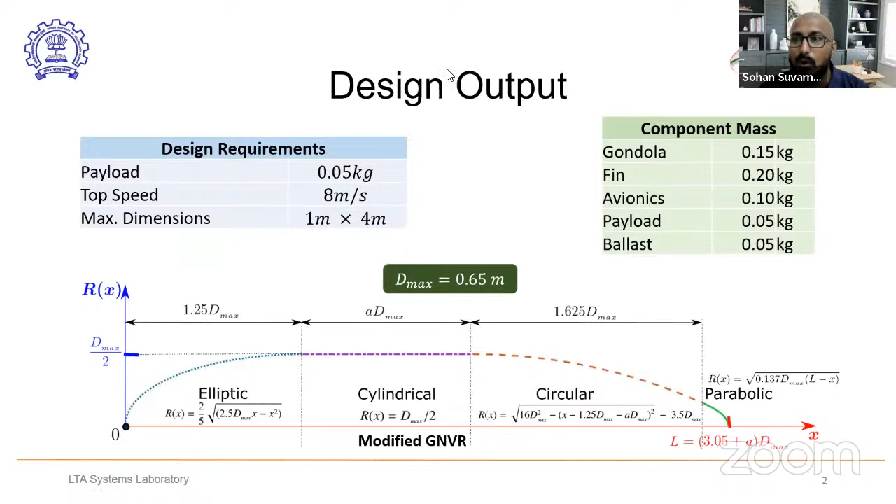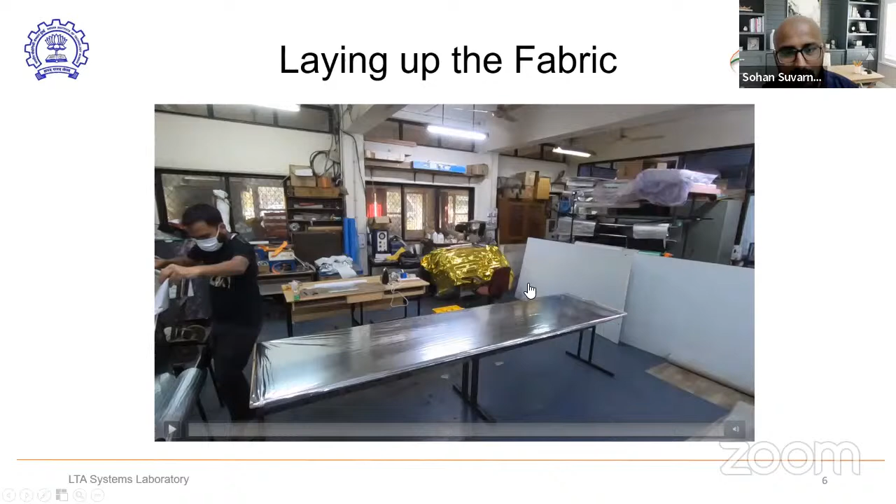After that, we would just lay the material. We have a roll here, and from where I'm standing I am handling the roll. You just roll the material onto the table and lay them one over the other. Here we lay the first layer, and then you just fold and lay another two layers, one on top of the other, just to save some time. So overall we have 3 petals being laid all together right now, and we just repeat that again and again.

So I think while we were making this, we planned to make about 2 envelopes, so one was a backup. We laid it probably 2 or 3 times, I think 2 backups and 1 actual envelope. So we laid it 3 times, so there would be a total of 12 petals, 4 per airship.

So this is the next step, we lay the petal. This is that petal template I was talking about. You get a 1:1 print and then lay it on top of this. So you have about 4 and another 8, a total of 12 petals, 12 layers of MPET under the template. So you would be cutting 12 petals at once.

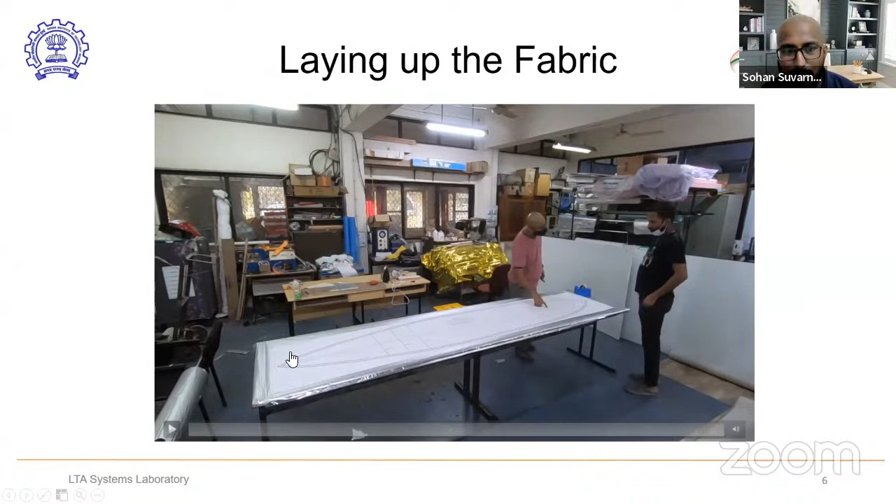Okay, so this is the template. You lay it on top of it, and you just make sure that it's properly stuck onto the material. And the next thing is just cutting all the petals, so you just cut them like this.

Again, I have to remind you, this is a very, very delicate material, about 30 microns thick, very thin. Which means you have to be careful while applying pressure while you cut. So I would say maybe practice on small bits of material before you actually use a cutter on the actual petal, so that way you know how much force you need to apply while cutting the petals.

So here, when we are cutting this, we are also cutting the template. You see this white extra paper that you have on the sides, so even that is being cut. We are just traversing the black line on the template, that's what we are doing.

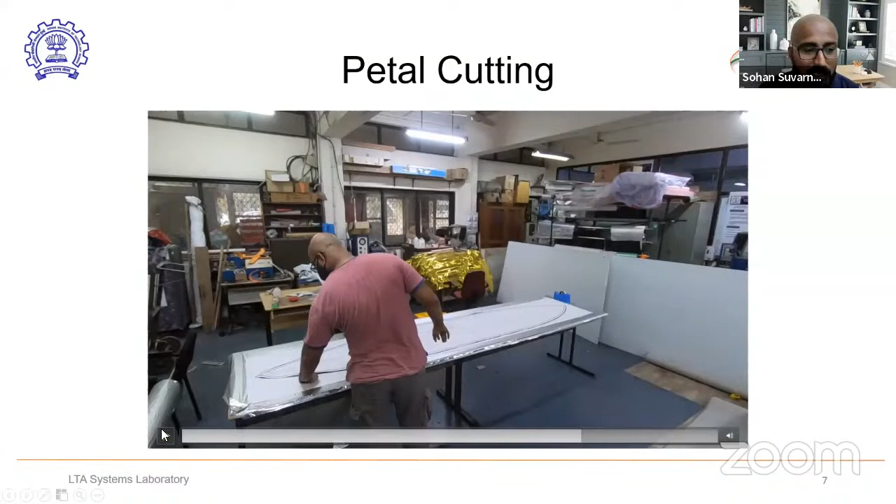So you basically just try to cut all the layers at once. You would have to apply enough pressure to cut all the 12 layers, and also be careful not to apply too much force and not cut it too quickly, because that would then damage your petal.

Okay, so once you have the petal cut, the next thing is you have to pick all the petals and just lay them all together. So this is the last 4 petals.

So you see, you can clearly see here that we have actually joined 2 tables. These are basically work tables where, in our lab, we keep the PC, and you have these 2 holes, so basically this is the desktop station. It's not a very good idea to have the cuts wherever you have these edges, because then it would damage your petal while you're cutting it. So you have to be very careful while you place the template, so as to not encounter abrupt changes in the surface. Okay, so we remove all these layers that we have.

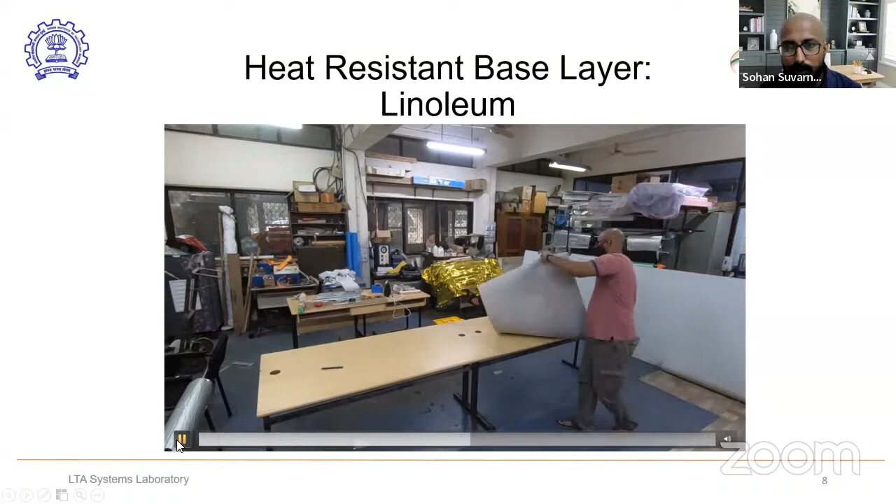Now this is something which is not exactly mandatory, but there are other things that you can do. This is something that I would suggest would help you in making a better envelope. So what we are doing right now is laying a layer of linoleum. This material that you see is linoleum, typically used for flooring, the blue material that you see, it's that kind of material. The reason why we are laying linoleum here is because it's heat resistant, and it also gives us a smooth surface while we are sealing the petals together.

So that's the idea behind laying up the linoleum sheet on top of the table. You could also use glass as a base, but having such a big, huge glass is then another problem—how do you handle it? And it also becomes expensive.

But if you don't have anything, you could just use the table, but make sure you have some kind of insulation on top, because if you have sun mica on the table, it's going to get damaged. On a wood table, maybe you can keep a layer of some heat resistant insulation material. This is easy to obtain.

For linoleum, you can look at these materials on India Mart. Even the envelope material you would get on India Mart near your locality. That is the best way to find materials for these things. So we just attach this on the surface.

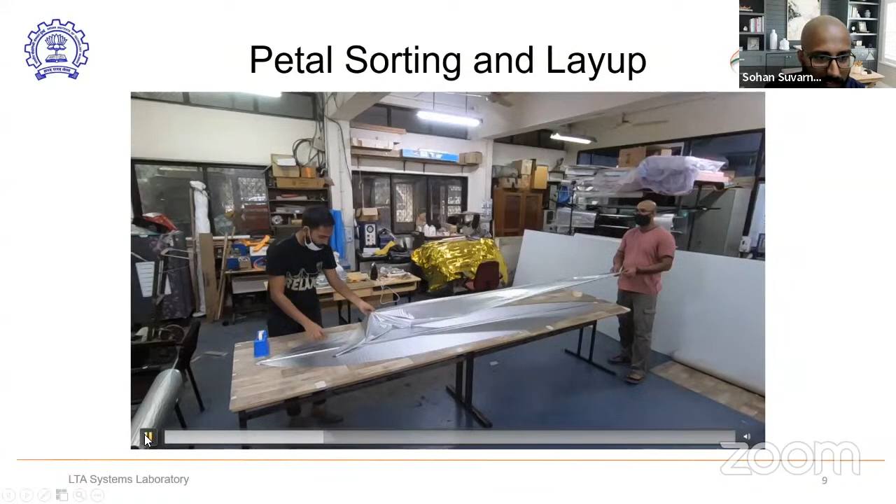You see, there is one half, and then there is the other half that we had put. Then, this is the last petal—the fourth petal. We put it so that the sealable layer is facing downward, so the shiny part is up.

Now all the sealable sides of the envelope are coming in contact with one another, and the non-sealable parts are on the outer sides. This is how we do it. Now make sure the petal sticks to the base plate very firmly so it doesn't move when you do the sealing.

So I'm cutting a piece from the side and keeping it aside. If you're looking at me, we will tell you why we did that later on.

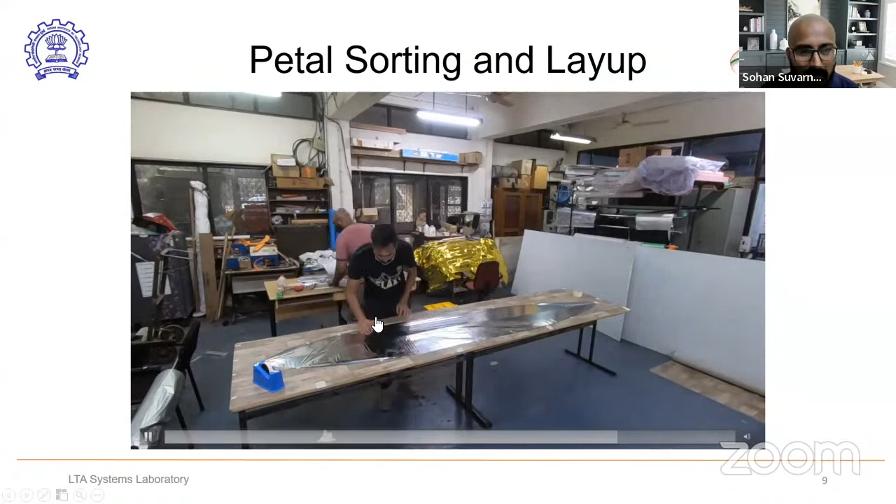So once the petal is put and sticks properly onto the table, the next thing we want to do is seal. There are a couple of ways you can seal the envelope: a butt joint, a lap joint, and a cusp joint.

So butt joint is something like this. When you go for a butt joint, you will have the envelopes such that one sealable side is facing up and the non-sealable facing down, and the other one would be the opposite—sealable, non-sealable, sealable, non-sealable in that way.

When you are actually attaching it, it needs to be in a way that this is the sealable part, this is the sealable part, and this is non-sealable. For butt joint, it should be like this, so you see that one side is non-sealable and the other side is sealable. That's how you would see when the envelope is blown up.

Lap joint, on the other hand, requires another extra piece. You just basically lay them up together, and then you have another material on top of them. That's lap joint. Cusp joint is basically you paste it like this - you have two envelopes, both sides sealable, and then they come together like this. So basically that is cusp joint.

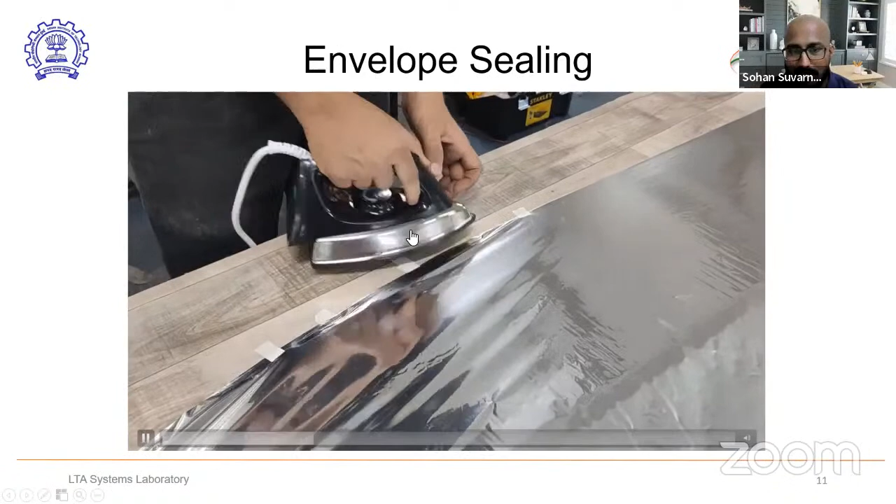You basically have to take your time in doing this. Using the iron, it would take about 1 hour to properly seal it. You have to handle it very well, get your hands steady on the envelope to get a smooth finish. Also, I want you to note the heat settings - for us, it was the middle option that worked on the knob for the heat. It might be different for the iron that you have.

Let me see, there are some questions. So for aerostat, which is the strong... Okay, let me answer those questions after a bit.

Once you move the iron on top of this, you basically are making sure you're sealing the petals together. You would have to do multiple passes - that's what we are doing here, just to ensure that the seals are well done.

So this is how you would seal.

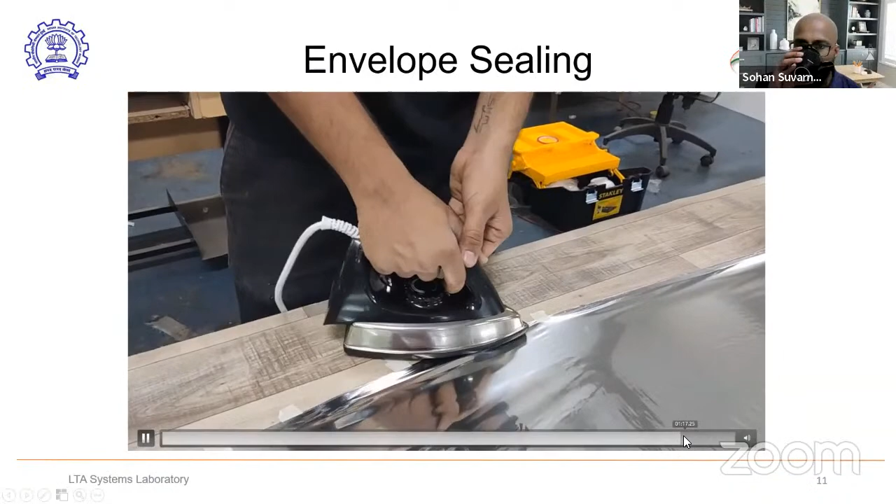All right, so let me take the questions now. For aerostat, which sealing do you suggest - which is a strong joint, lap or butt? So for aerostat, it depends on the size that you want to build and also the material that you're using. If you're making a small aerostat, you can just go ahead with the electric iron and make an aerostat. But if you want to make a big one, then your material would change, then you would have to use something a bit more elegant, like radio frequency sealing if you're using PVC or polyurethane. You can also use adhesives if you're using polyurethane - there are some PU adhesives that you can use.

So then there is another question - the butt joint you're showing is actually the lap joint, and the lap joint is the butt joint. I am not sure that is right, but you can have a look and let me know.

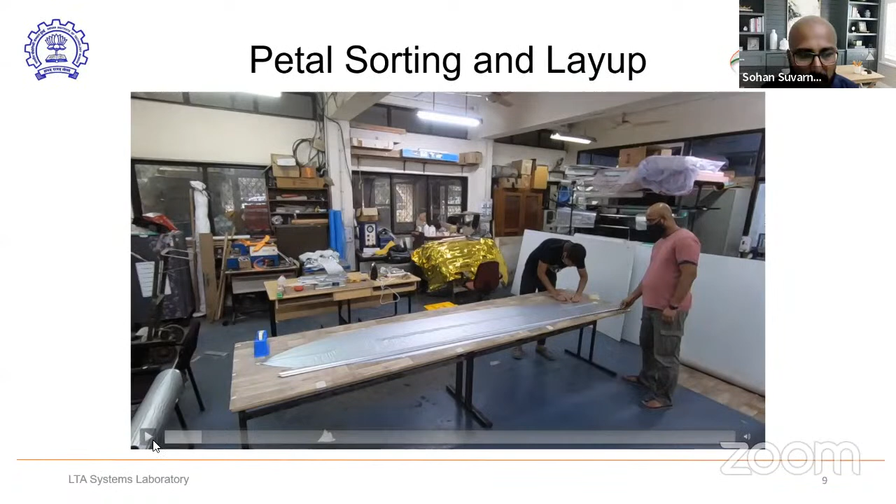So once that is done, you place the half here. The reason is when you actually blow air into this, or even a gas, it would basically open up. If it is folded, it would just open up like this. So that's the reason why we keep it folded in between.

You can actually try this out on paper. Cut the petal shapes very approximately, try to get this form. Mark the sealable and the non-sealable part on the paper, place it like this, then apply glue on the edges, and when you blow it, it actually takes the shape of the envelope. That is the reason why we want to place it in this fashion.

It also would not damage your envelope while you're sealing it, because then you would have to turn it over and over again. If you're doing one seal at a time, it means you have to turn your envelope every now and then.

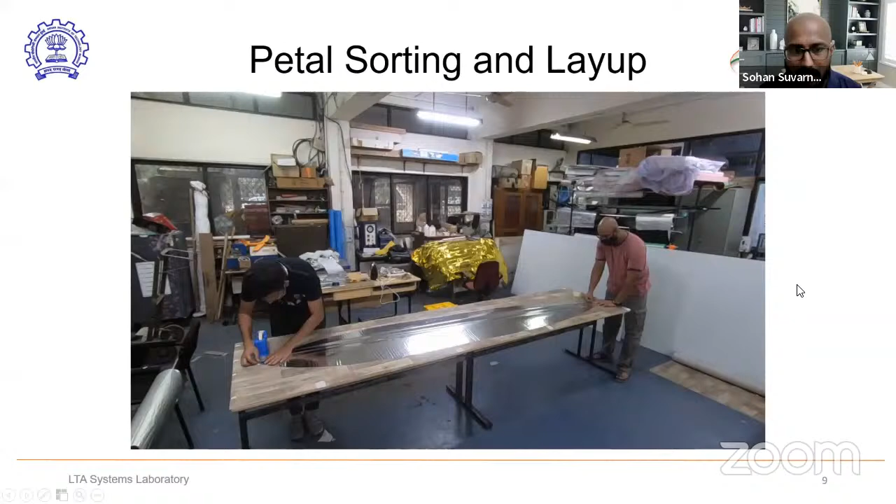I think that answers the question on why that. So the next one is the nozzle. Once you have done the sealing of the envelope, you need to also be able to fill it, so that is why we need a nozzle.

This is what I was doing earlier when I said I was cutting a piece of material. You basically cut a piece of the same material, MPET. You cut it very nicely and get this piece - a rectangular strip.

Then you fold it, and now you would seal at the edges. You basically seal at the edges. This is a double pass, so we are ensuring that the seal is firm.

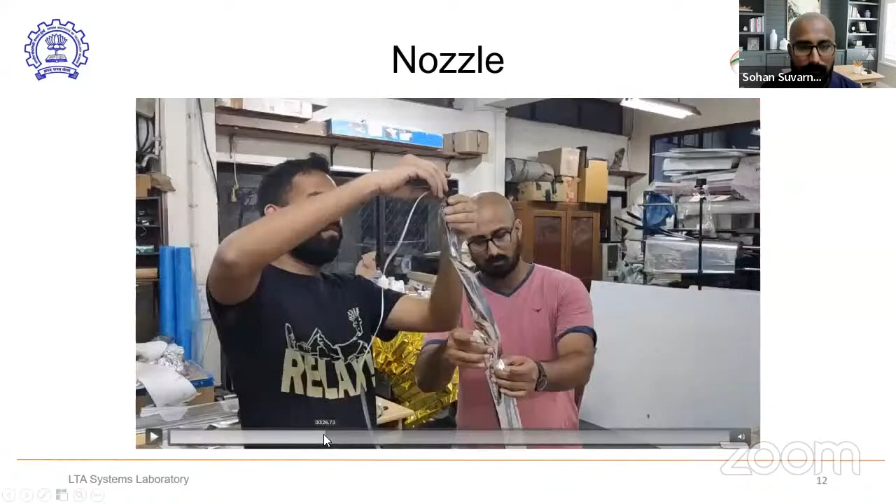Once you are done with the sealing, how would you actually attach this part? As I told you, the shiny part is not the sealable part. It's the white, less shiny part that's the sealable one, the polyethylene layer.

So what we need to do is turn this pipe, the pipe that we just made, inside out. How do we do this? We would basically insert a rope or string to get it on the other side.

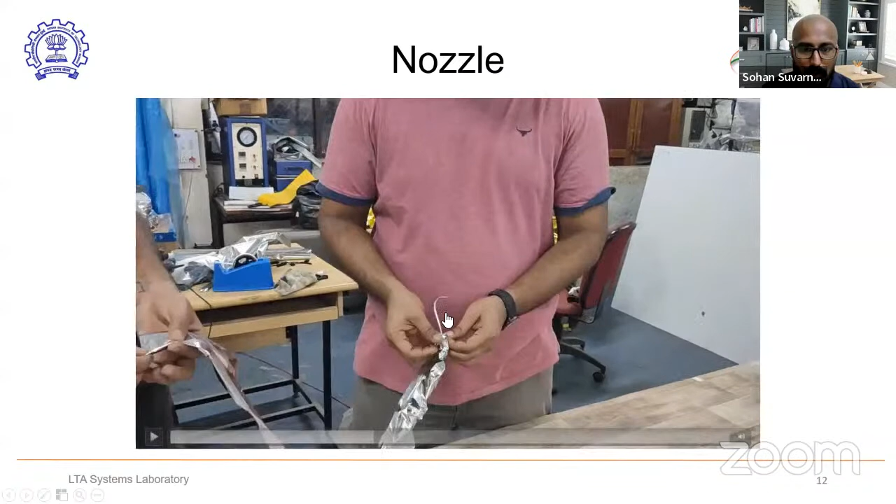You basically drag the string to the other side, so you have the string over here. Once you have the string, you attach it to the end of the pipe, the nozzle you just created. I just stick it with tape - you can use any kind of tape to stick that thread, then pull the thread from the other side. That way you are basically turning it inside out.

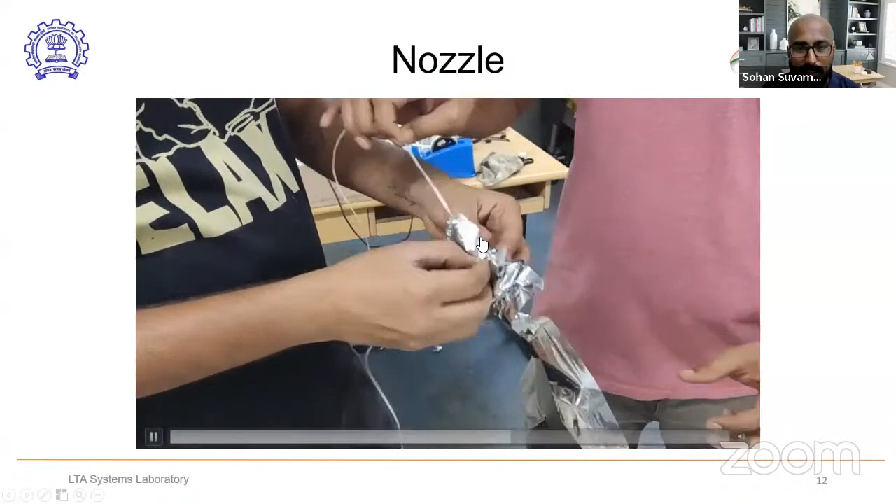So now what happens is the shiny material is on the inside, and the adhesive or sealable layer is on the outer side. You just pull it all the way out, and then you have this sealable part on the outside. So now you have the side you can work with, which you can put in between the petal welds, and you can have the nozzle there.

So here is your nozzle. You can remove the thread after you're done because you don't need it anymore.

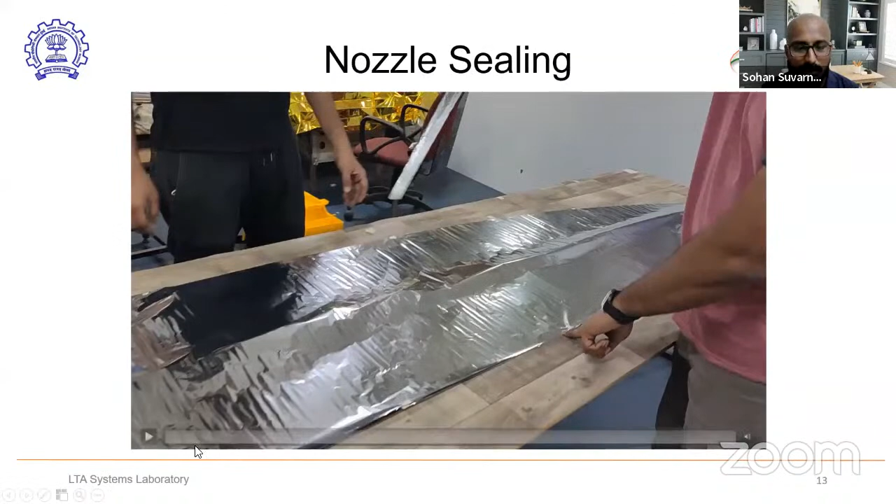Okay, there is your nozzle. The next thing you want to do is seal the nozzle. You place it towards the tail and towards the bottom petal, basically putting it in between two petal seals. You put the nozzle inside and stick it with some tape so it stays in place. We're using masking tape to make sure it doesn't move when we are sealing. So this is before we actually start sealing the petals.

Okay, so I'm putting a layer of butter paper, or tracing paper as you may call it, on top of this, so that when I move the electric iron on top of the material it doesn't stick, because the nozzle has the sealable part sticking outside. If you move the electric iron on top of it, it would just stick and damage the surface of your electric iron. That's why we are putting this butter paper on top.

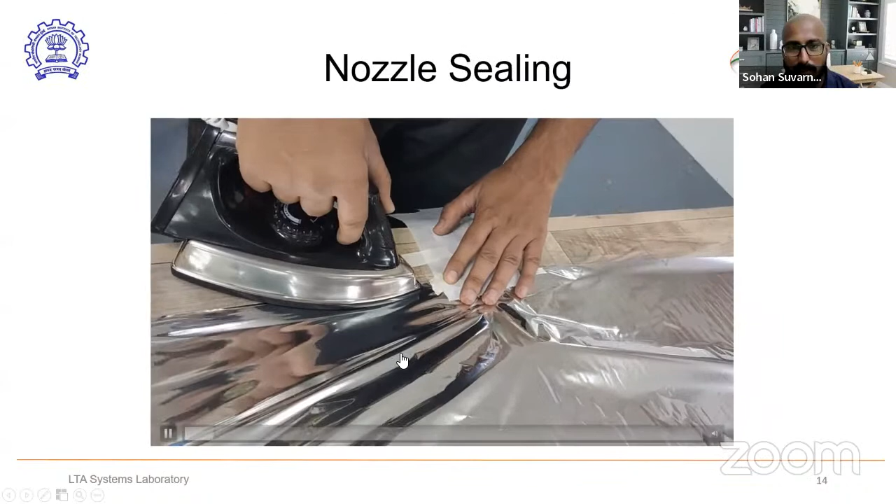You make sure it stays in place using tapes, and next you just move the electric iron on top of it to seal it that way. You have to be very careful, and maybe apply a little extra pressure while sealing the nozzle, because there are more layers there, so the heat needs to penetrate all the way down. So you make a couple of passes over the nozzle and you have it sealed.

Okay, so basically you are able to seal the whole petal now by these methods. Now once you have the entire sealing done for all the joints, you would basically want to check if there is any leakage.

The first thing that we will do is fill it with air, using this kind of pump, an electric air pump. This is very cheap, you will get it for about 500 Indian rupees, you would get this on Amazon. This is typically used for inflating air mattresses, inflatable toys, and things like that.

So there was one question: is there any other way of doing the sealing, like using any particular adhesive? Yes, but not for metallized polyethylene. For metallized polyethylene, heat sealing is the best thing that works out. It depends on the material that you have. Depending on the material, you can go for adhesives. As I mentioned, if you go with PU coated nylon, you could use PU adhesives. Although you have to be very careful while using adhesives, because adhesives also take up weight. So if you use 100 grams of adhesive, it would just add 100 grams of weight to your airship.

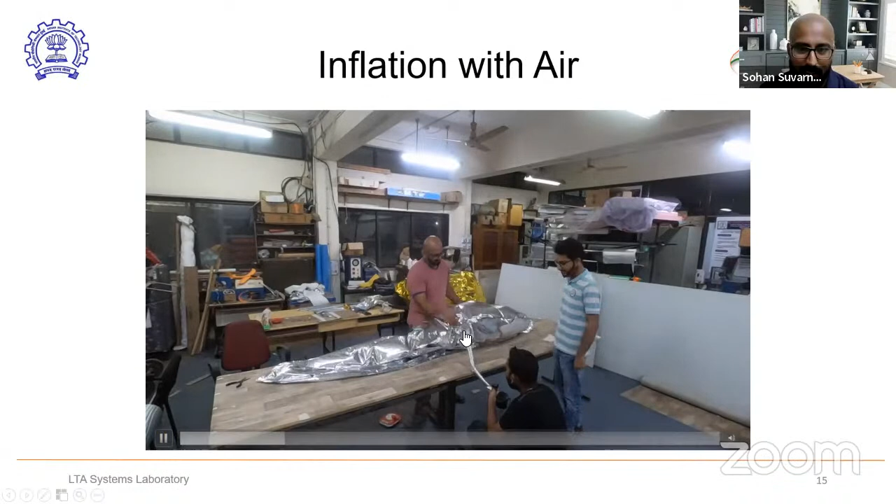So let's go ahead with the inflation. Raman has plugged in the nozzle to the air compressor, air pump, and we are just blowing it up. I'm making sure there is no leakage at the nozzle, and we just fill air, inflate it. So you see, this is how those folds basically open up now.

I don't know if it's very clear, but here around this point, around the center line, there is this faint line. This is the folded petal in between, and this is the reason why we had to do it. When this is folded, this seal and this seal both got sealed together at once. That's why we folded here at the center, and we placed it the way we placed it because that way we were able to seal it much quicker.

Okay, so it's all inflated now. Raman just folded the nozzle there and put some tape on it so the air doesn't leak out. That's the reason why you would want to have a very long nozzle, so that way you can fold it up and apply tapes on it so it doesn't leak out. That's how you're ensuring the gas stays inside.

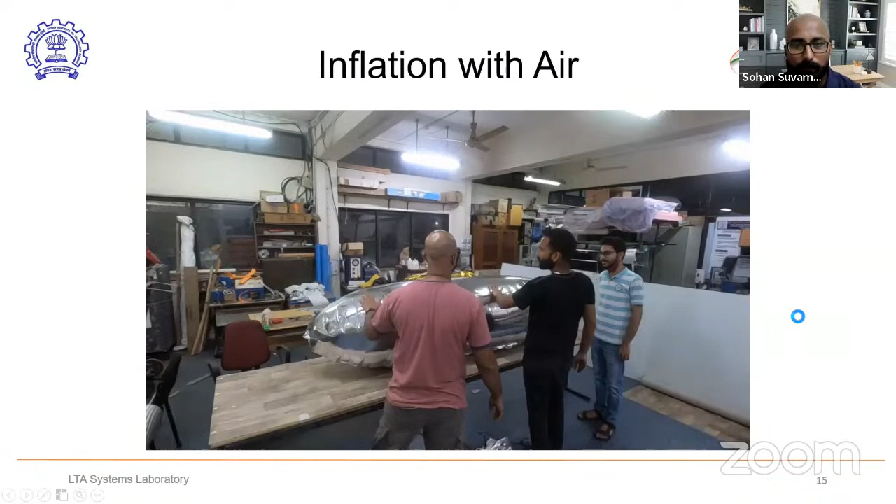Okay, so once you're done with inflation, I will show you the most sophisticated way of measuring leaks using a very sophisticated sensor, and that sensor would be your hand. I'm just moving my hand on top of these seals to see where exactly there is leakage, if there is any leakage over the seal. You have to be sure that the first thing that is very likely to leak is the seal, so that's why I'm checking the leaks there first.

So Raman is holding the envelope a little pressed like that, because we want to know whether the air is gushing out, and that happens only when the pressure is high inside the envelope. That's the reason why he was holding it tightly, so the pressure inside is higher.

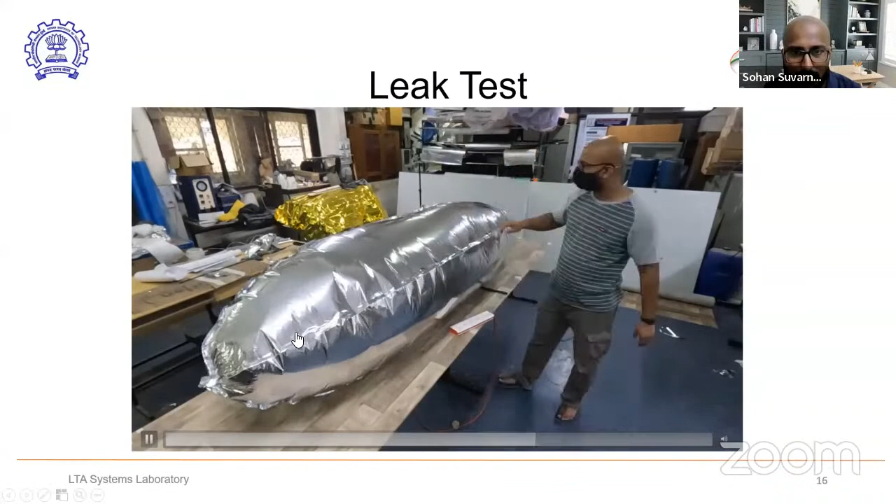So I think, yeah, for this envelope there was a leak on the petal itself. There is this small dot here, I could feel some air moving out. So we are using a sellotape to just patch that particular leak. This is how you would repair your envelope, just apply a patch and there you go, as simple as that.

So there's a question about how to prevent kinks. If there's enough envelope pressure inside, internal gas pressure, then there won't be any kink. That's what maintains the shape of the envelope.

Can you use soap or shampoo to check for leaks, like a puncture guy would? Yes, you can, but unfortunately you'd have to apply it all over your envelope, which gets messy. Also, dipping it inside a bucket isn't a good idea because finding such a big bucket would be a real challenge. Maybe you'd have to take it to a swimming pool and dip it all the way down, like the puncture guys do. But it's not a great idea because you'd have to carry the whole thing to another place and dip it. It's also difficult because of buoyancy, since the difference between densities of water and air is high.

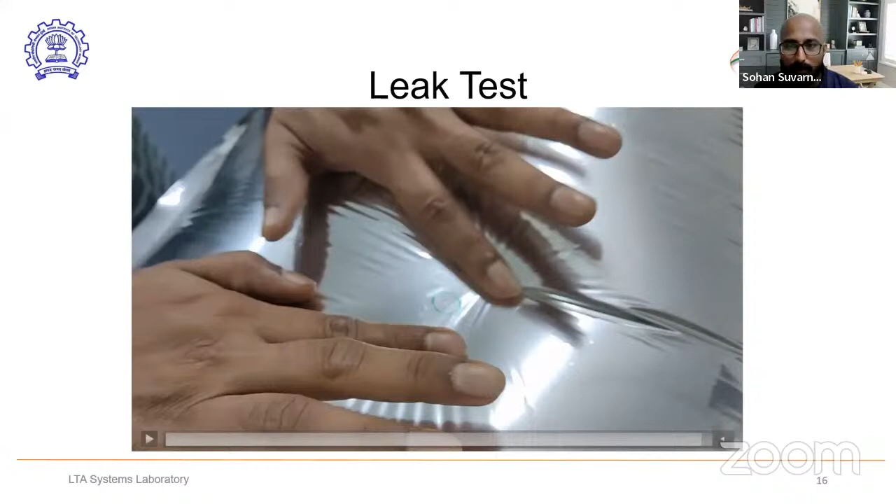However, that again would invite a lot of trouble. So the easiest way is just using your hands. Trust me on this, it's the easiest way. I've tried other methods, but this is the one. You have to be really slow about it. This footage is actually at 8x speed, so I've been very slow while checking for the leaks.

There would be a lot of wrinkles on top of the seal. When you look at this, there are many wrinkles, and when you apply tape on top of it, there would be airways in between through which the air could gush out. That's why you don't use tapes. However, if you want to cover the seals, you can apply sellotape after sealing, so you get a nicer looking envelope. In fact, I used to do that for a couple of my airships as well.

Girish asks, do you leave the joint cusps on the outside, or is there a way to turn the envelope inside out? There is a way. Just like you did it for the nozzle, you can do it. You just leave one end open. But then the tricky problem is you would have to seal the open end. That becomes tricky, and in our experience it usually ends up having a lot of leakage at that point. So we usually don't do it, but you can. It's not that you cannot.

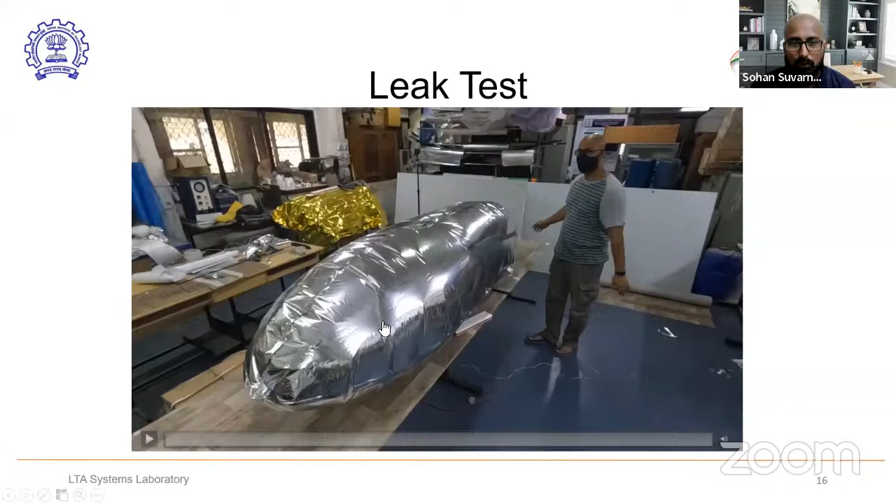Okay, so let's move ahead. I've already discussed this air pump that we use to inflate the envelope. Now the next thing we want to discuss are the hooks, because as of now the envelope has nothing that you can mount something on. So you need some kind of hooks using which you can attach items onto it, like the gondola, the fins, and anything else you want to attach. This is one way of doing it, a very simple way, and let me show you what it is.

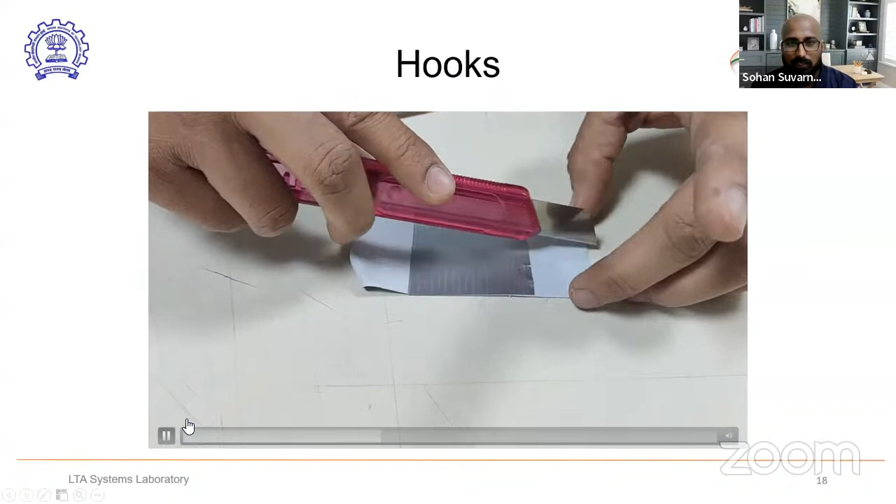So that's a duct tape, it basically has a layer of fiber on it, and the adhesive is quite strong. What we do is take this, put the adhesive side up on the table, then cut a smaller piece and make a band-aid out of it. Here the white ends are the adhesive ones, and the silver one is stuck onto it, so that side is not adhesive anymore. Then we just cut it into half, and now you have two band-aids. This band-aid is the hook.

I want to talk about that blue line as well. This is another airship on which I'm attaching the hook. You basically attach it like this, so you have a C shape there, kind of like this. Here is where your non-adhesive part would be, and this red one is the adhesive part. So this is how it would stick, and you can basically put anything over here, pass a rope through it, or even a pipe, or whatever you want to do. It's basically a hook for you.

The blue line here that you see is that tape I was talking about. This is again a cusp joint, and on top of it we put a blue tape because we wanted to hide the joints. This gives a nicer look to the airship. You can also make it a little smoother, more aerodynamic, because when the cusps are hanging out, the seals create additional drag. If you just stick them onto the envelope, it remains smooth. It's not mandatory, however.

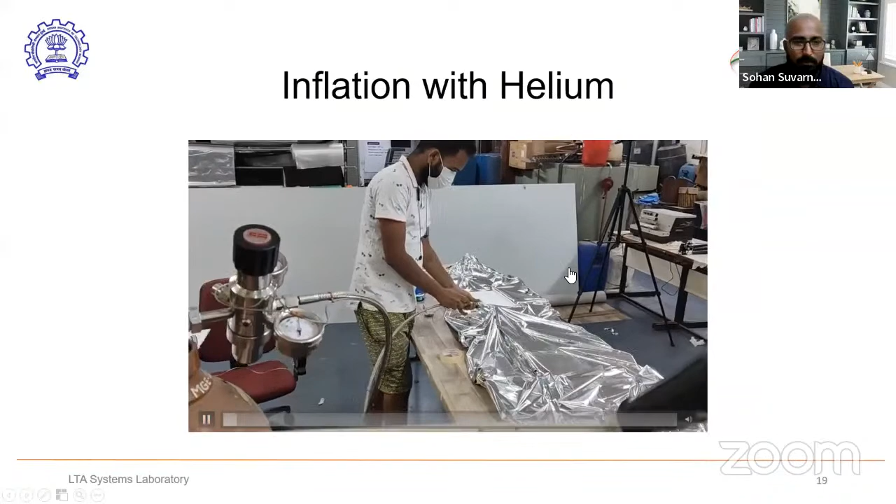Okay, let's look at the helium bit. Once the air is removed from the envelope, you want to inflate it with helium, and that's what we're doing. We put the nozzle of the cylinder to connect with that of the envelope, and there you see it's very slowly increasing. Raman is constantly controlling the pressure, so we have control of how much gas is being released into the envelope.

Okay, I want to show you something here. Have a look at these seals. So here you see four seals. These seals are put here to attach the gondola. And this is the bottom petal.

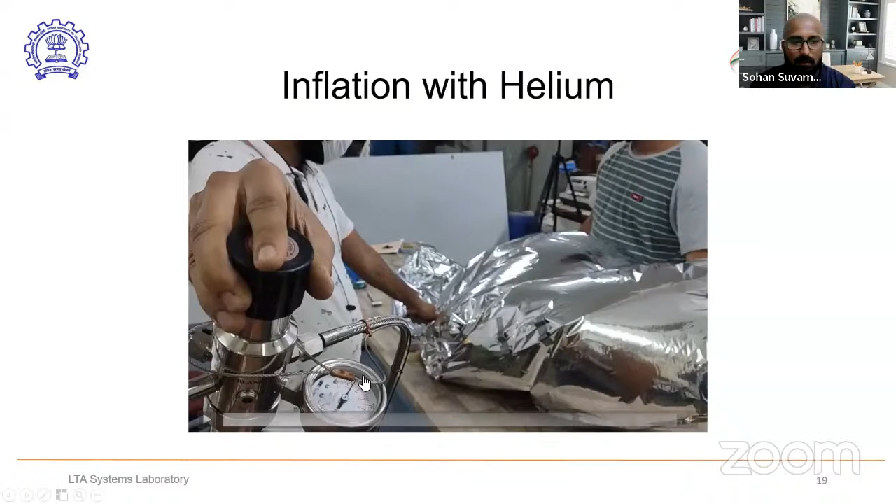So going ahead with the video, we'll talk about that later in further sessions.

Here you see an example of a kink. The reason this kinking happens is because helium tends to go upwards, since it's a lighter than air gas. So two independent bodies of gas form here, one at the tail end and one at the head, both having the tendency to move upward. That's the reason you get this kind of shape. But when there is enough pressure, both gas bodies connect and the kink disappears. That's why maintaining internal pressure is important.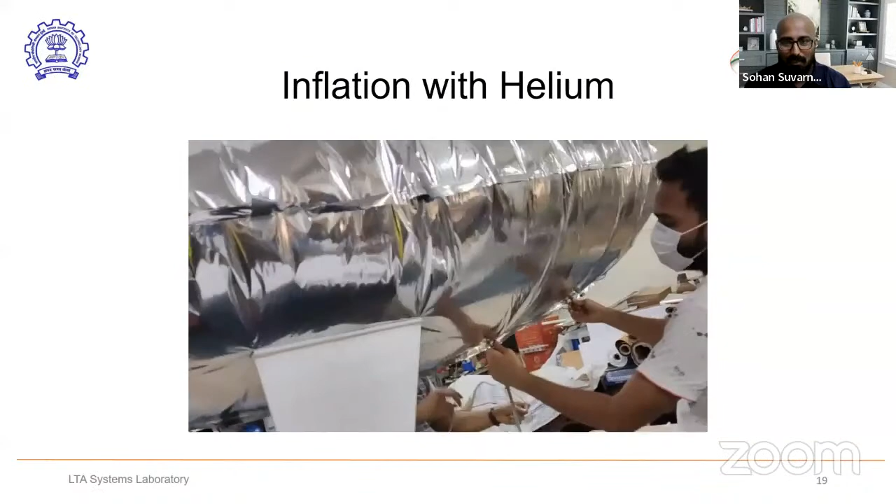It's very difficult to handle while filling it with helium because your envelope is constantly trying to go up. See, without any effort, it's just moving upward, and I'm holding it down, and on the other side Raman is also holding it down. So what I'm doing right now is using the gondola hooks to fasten a thread there, tied to a weight on the ground. That's a 5 kilo weight. I just tied it so the envelope stays there.

We'll talk about this fins part later on, so don't worry about the fins or how it was mounted there.

So basically you just put the ropes through the hooks, and then you just fasten it to the ground so it stays grounded.

That's about what I wanted to discuss about envelope fabrication. If there are any questions, maybe you can ask them on the Q&A.

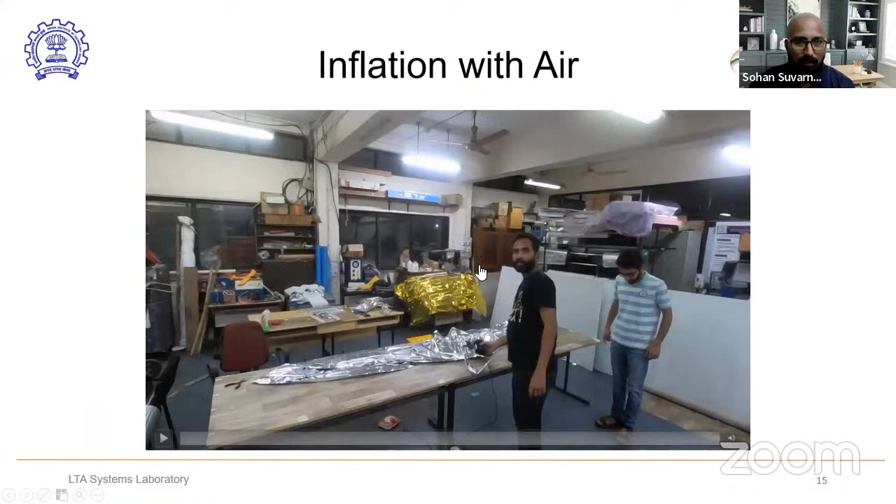Okay, I don't think there are any other questions. Oh, there is one question.

I think the tape question is already answered. I'll answer the question from Chaitanya: whatever we are showing you is available on YouTube in a live session, and it will be available thereafter. So there's absolutely no need for you to worry or ask us for the PPT. We cannot share the PPT with you, but as I said, this is being webcast and will be available for the foreseeable future on YouTube.

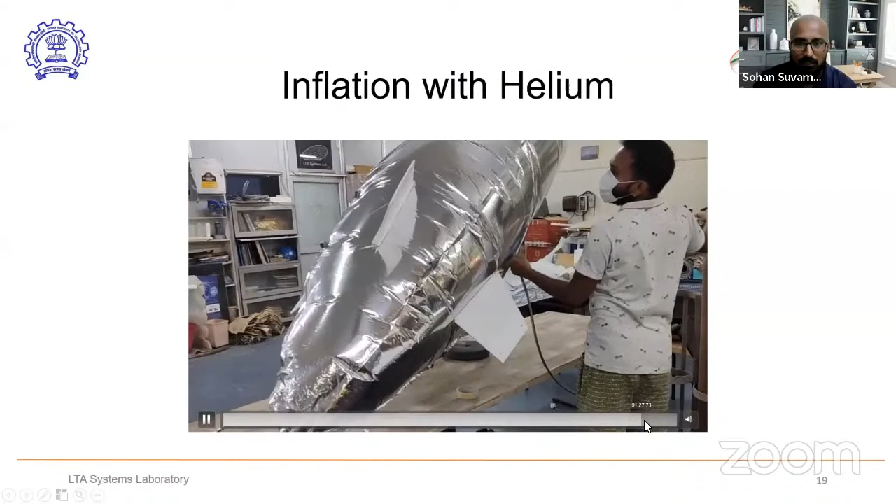So this point, basically from where the thread is coming, is actually the center of volume, and you're precisely able to calculate it. There is a mathematical formula for it, or you can also use calculus to calculate where the center of volume for any given shape would be. Basically, it would be the area where it coincides with the CG of the bare envelope. You consider the envelope as a solid body, and if you calculate the CG using SolidWorks, that is basically also the center of volume of the airship envelope. So that is the point at which we are mooring the airship.

Yeah, I think that is answered. I'm done with the presentation. Thank you for your attention.

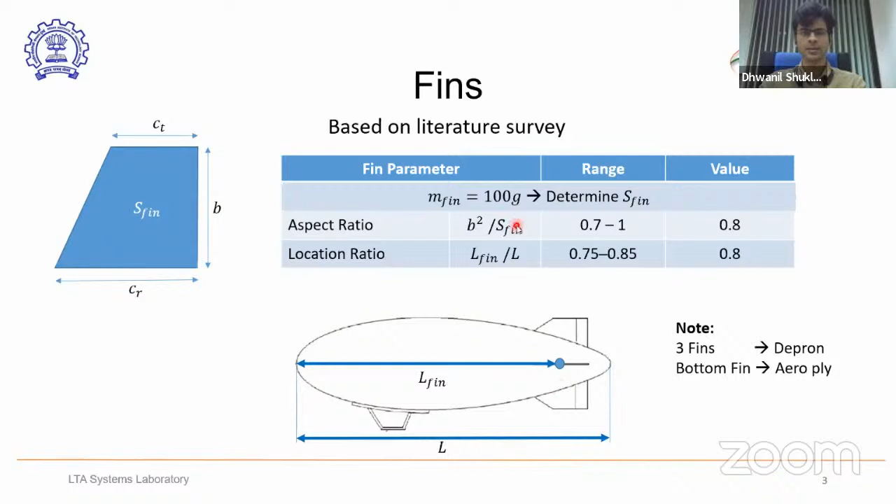So here is a quick video on how the fin was made. I'll just comment on what it is, what's going on.

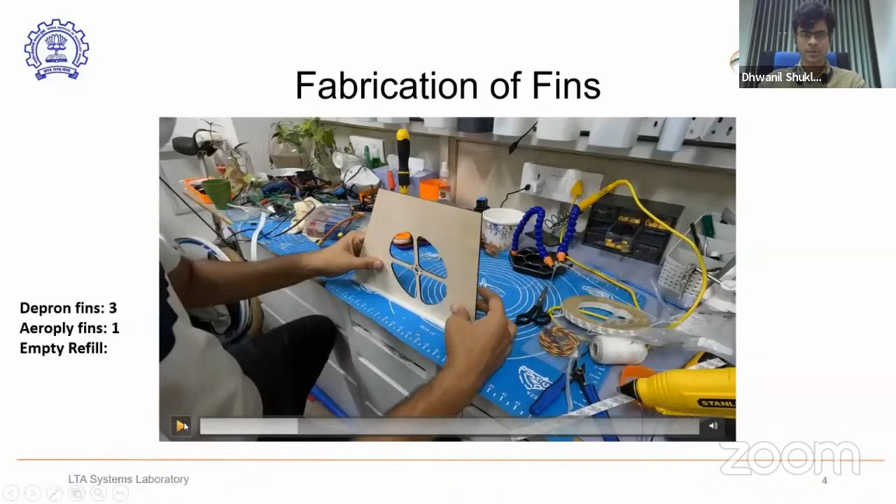So we basically stuck this one too. Beyond that, we are trying to strengthen the bond between the fin and the base by adding more Depron material and then using a hot glue gun to glue the sides and the base. We do the same thing for all the fins.

So here what we see is some kind of frugal innovation. These things are actually the ends of refills, mostly ink pen refills. We wanted some tubes, and this seemed to be easily available, so we cut the refills into small pieces to have this kind of tubular material available to us. What we're doing next is drilling into the fins at the top 2 locations and inserting the refills. This is done so that later when we put a guide wire or fishing line through it for better strength, the Depron material does not get cut, because the refill plastic is going to be stronger than the Depron material.

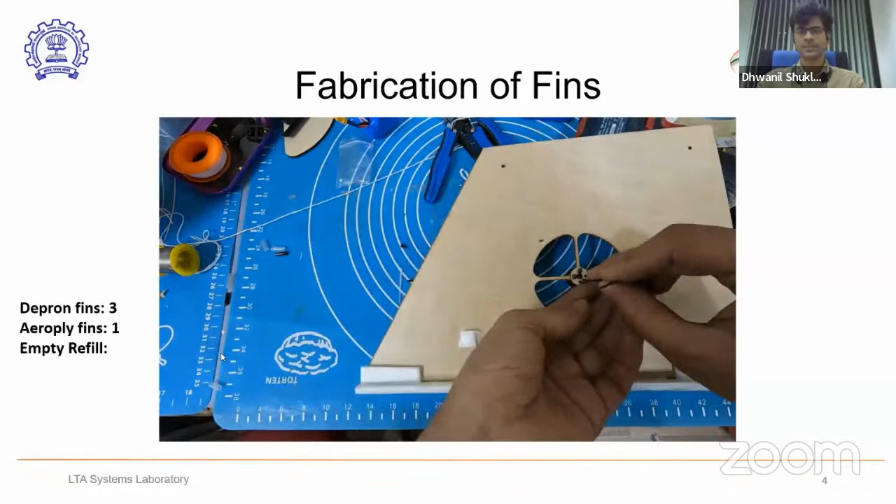So we have the motor in place, and we have the propeller also - the propeller is tightened using another Allen key. Depending on what propeller you're using, there are different ways in which this attachment can be made.

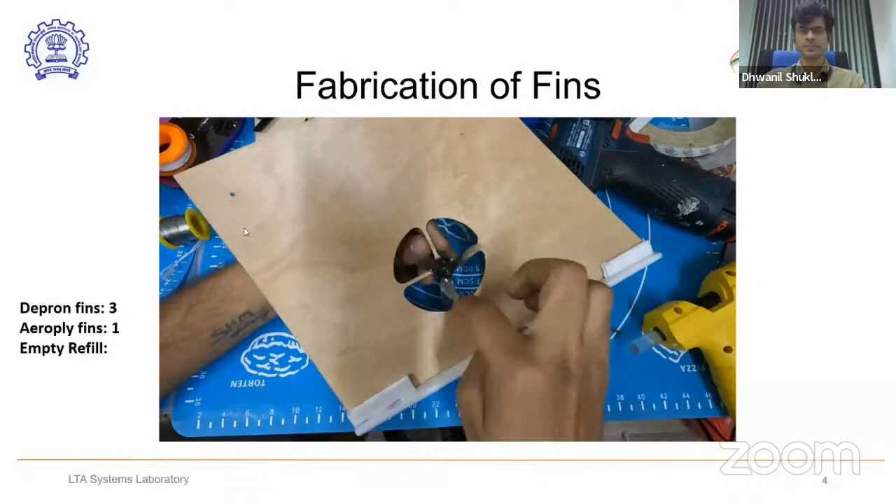All right, so we are done making the fins. Next step is to mount the fins on the envelope. Before we do that, it is important to make markings on the envelope so we know exactly where to place the fins. This is best done when the aerostat is deflated, because you have more control over making such lines. Once it's inflated, it's difficult to make a straight line and take measurements.

So we have 4 such marks. I believe you can see one such mark here, this green line, and there are 3 other such marks around the envelope on each petal. Also notice that these marks have been made between the sealing locations - there's one sealing location here, another one somewhere else, like below here, and we want to place the fins right in the middle.

Okay, so I'll play this video as well. Other thing I'd like you to notice are the hooks, the things that Dr. Sohan mentioned that you can make using duct tape. These are going to be used for fastening the fins so that the fins don't fall off. So here we just have tape.

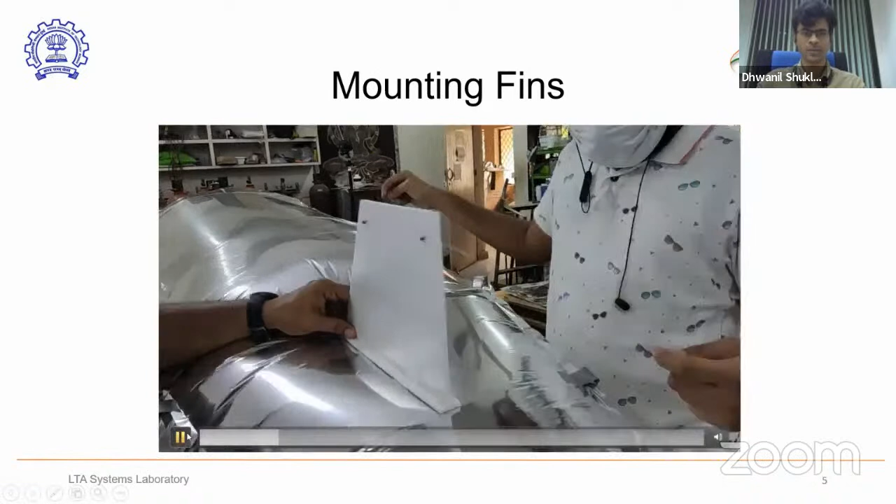We got the fin in location using double-sided tape, but that's not going to be enough. So we then place fishing line or very thin wire, which you may not be able to see in hand, but you can. Let me see if I can pause it and show. So these thin lines, if you're able to see them, are being used to fasten this fin with hooks on the sides, on the ridges, on this side as well as the opposite side.

You just have to learn how to tie the knots, and the motive is to have the fins properly placed and perpendicular to the envelope.

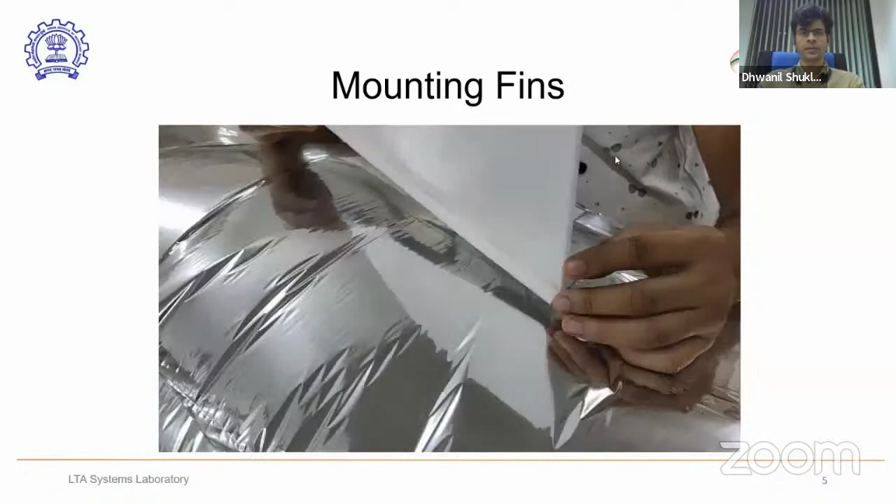Other thing that would be nice to notice is that this exercise was done when the envelope was filled with air and not helium.

You can see, sorry for interrupting, but your voice is cracking slightly, your audio seems to be cracking. See if you can do something about it. Yes, I might have some internet issues. Yeah, it is okay. Should I just stop my video just in case? Yeah, that is better, put your video off, it will be better. Sure. Yeah, I think there's some problem with internet for the past 2 hours here. Has my voice become any better? Yeah, there is some improvement, so better put your video off. Some improvement is there, yes, please go ahead.

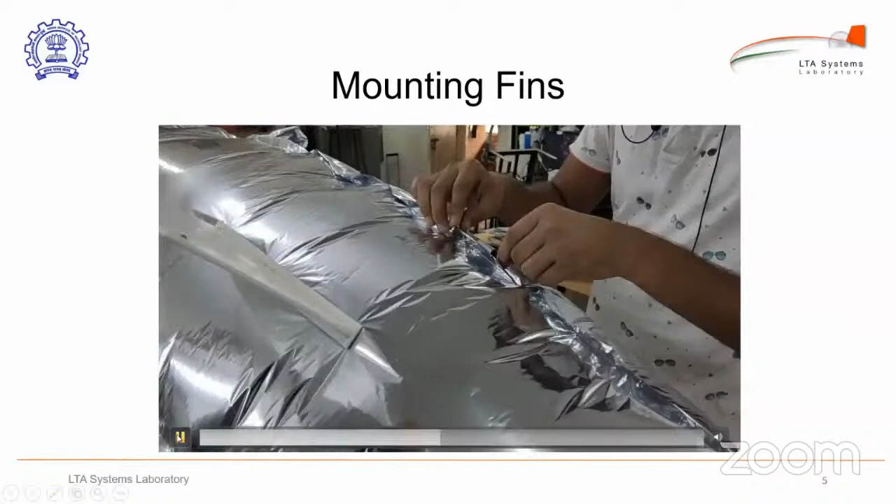Okay, yeah, so maybe if I was not audible for some time, all I was trying to say is that we are tying the fin to the envelope properly using the hooks, and we are doing so when the envelope has been filled with air and not helium, so that it's easier to handle. So this is for one fin, similarly you do for the others.

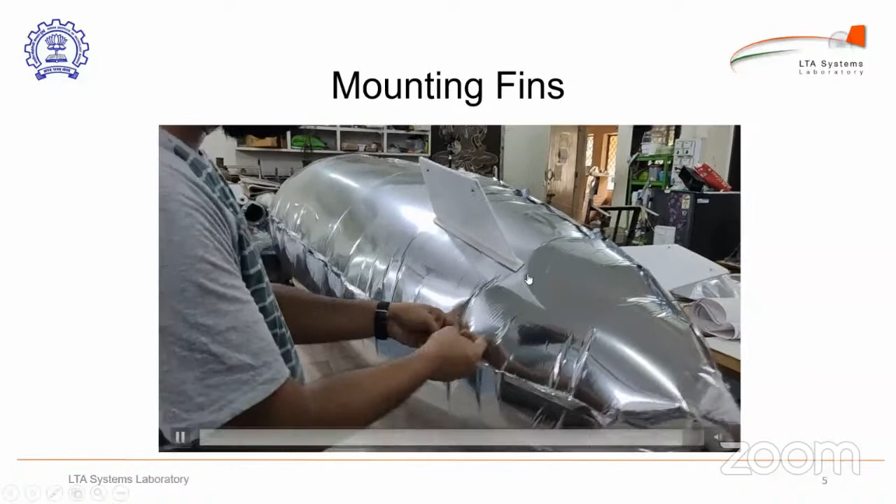I'm just skipping the video, but you get the idea that you have put multiple fins on the envelope.

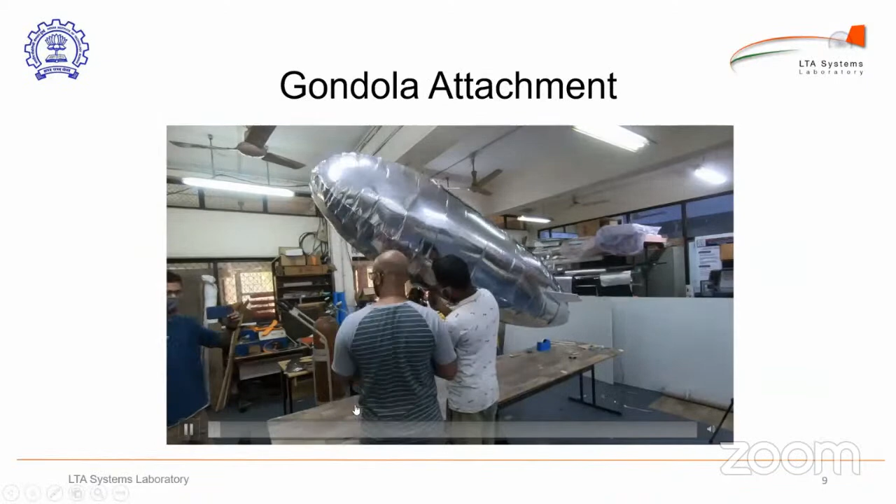Here we see we have an airship envelope. Okay, sorry, it seems my PowerPoint has crashed. Just give me a minute.

Sir Shukla, maybe you can play it on your video player, this video, if you have them downloaded. Just a minute. Yeah, I think it's, yeah. I think I'm back here.

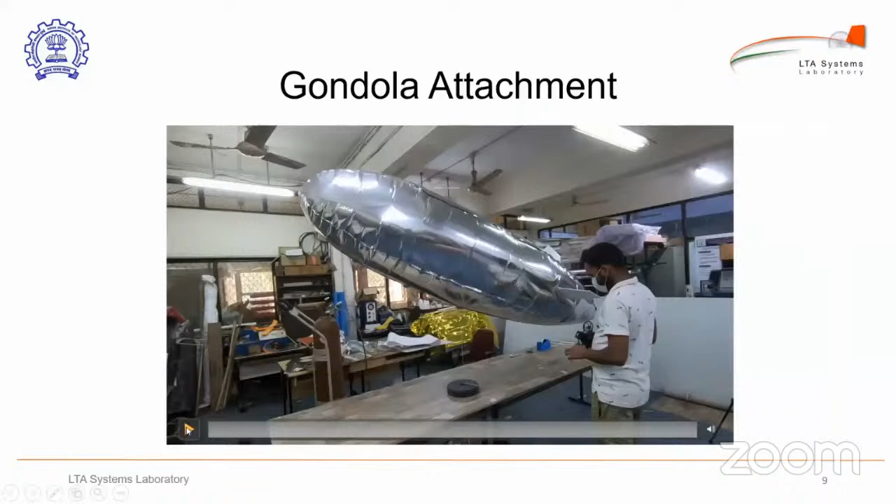All right, so in the video, basically, as I described earlier using the photographs, the gondola was stuck using the duct tapes and the carbon fiber rods.

And beyond that, you want to strengthen the bonds even further. So what is being done is the fishing lines are being tied from the gondola to the hooks, to these other hooks we see.

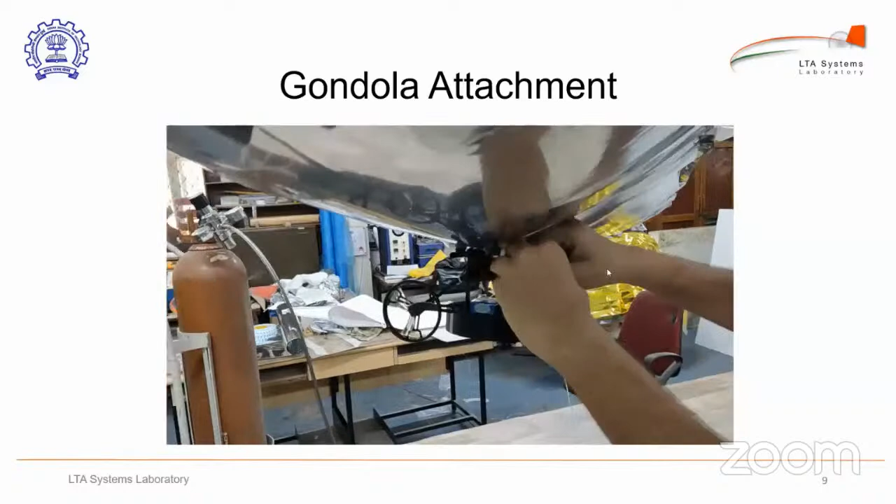Let me just find a good opportunity. I think the PowerPoint's here. So let me point out that these hooks that we see here on the sides are on both the sides.

So we are attaching the fishing lines from the gondola to these, so that in case these tapes fail, then you still have additional support. We definitely want to make sure that the gondola does not fall off anytime during the flight.

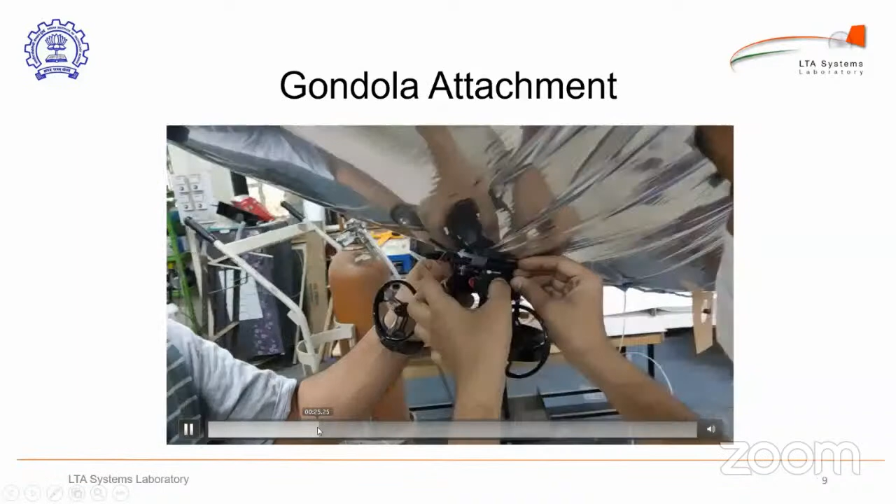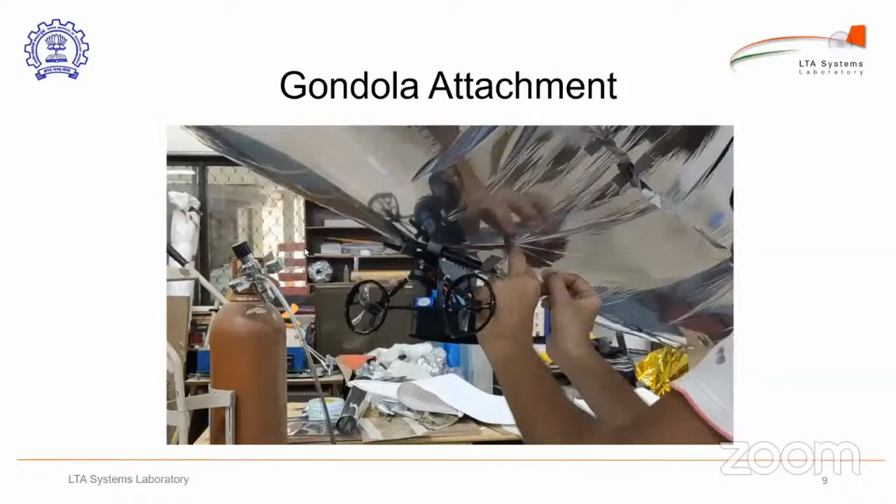I think the rest of the video is just inserting more fishing line through the holes. And if you're wondering where this fishing line is being connected to, let me show that here. There were multiple holes provided in this design so that you have some place to thread it through.

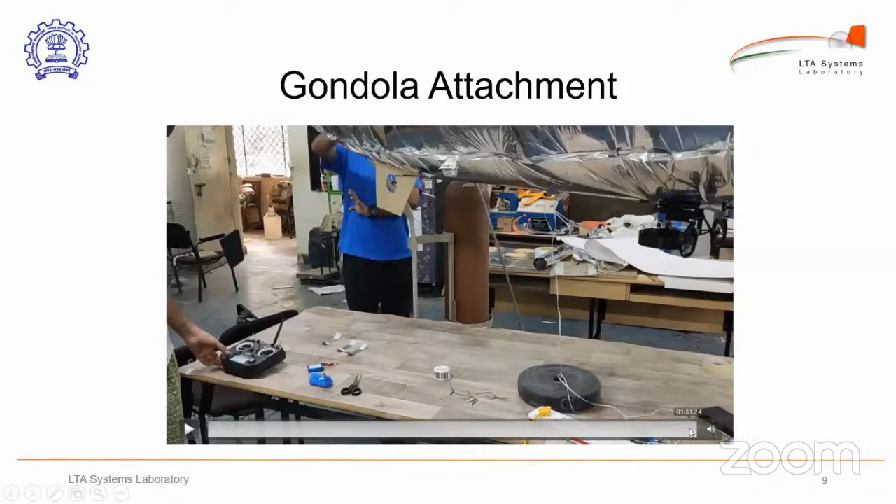Okay, so by the end of this activity, you have the gondola and the fins attached to your envelope. So any questions on what we just covered?

How is gondola location determined? When you were designing your airship and doing all these calculations, you already had an estimate of where to expect the CG to be, and for static stability, where the gondola should be. So your first guess will start from there. If you need to adjust it a bit here and there, that is also okay, but undoing a gondola that has been fixed at a location will probably damage the rest of the aerostat. So it's a good idea to plan the location of the gondola before you even start working on anything on the airship physically.

Okay, any other questions? Yeah friends, these questions are meant to clarify your doubts, so don't hesitate. If you have queries or questions, you can ask.

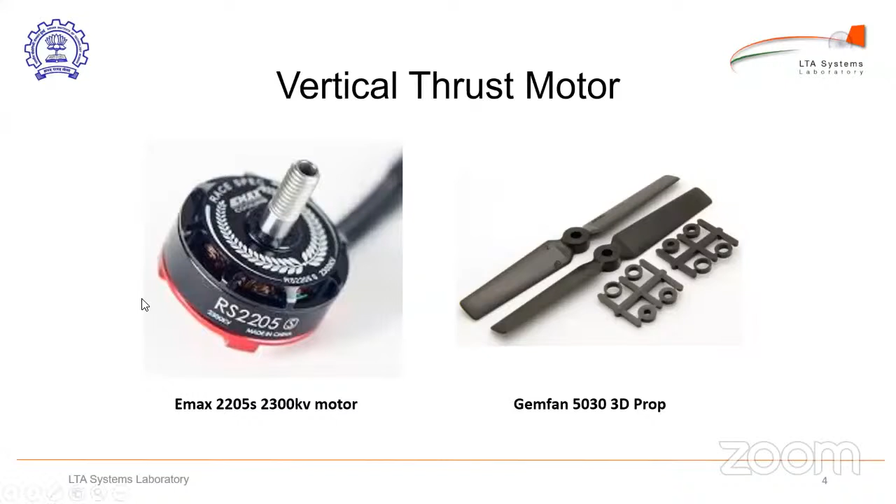Now, when we come to the electronic speed controller, please notice that for this project, because we want to use it as a reversible ESC, it needs to be a BL Heli or BL Heli S firmware based ESC. Simon K and any other firmware will not be used because the configurator that we're going to use for a reversible firmware is based on BL Heli firmware.

The reason we're using the BEC is we want to power the radio receiver, or in case you want to use a servo, you also need additional power of 5 volts to power your servos. That's why we need an additional UBEC. This is rated at 5 volts at 3 amps.

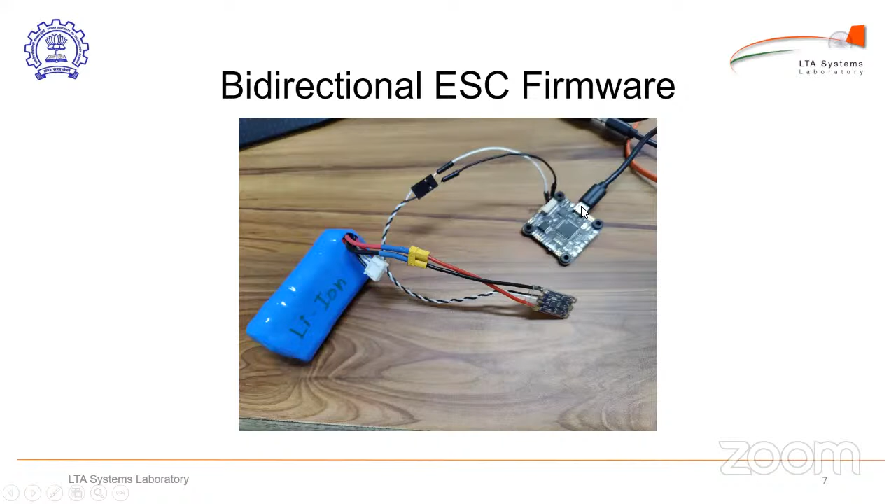So then you connect this with the micro USB cable, so we go to the configuration section. For the configuration, we're using a BL Heli configurator, which is an app available on the Google Chrome web store, or you can download it from Google as well. Please notice that it uses BL Heli firmware only.

So when you connect the micro USB, you will notice the COM port shown. I'll play this video. So when you connect, it says the directions: connect power to the ESC, which you have already connected.

Then you will see a layout like this. Basically, this is your particular series or model number of your ESC. And then here you see the motor direction. You can reverse the motor direction even without switching the two wires, by connecting to this configurator.

Here, what we're going to select is bidirectional, because we want the motor to spin in both ways.

What I'm doing, the PPM center throttle, it needs to be at 1500, and the maximum throttle should be 2000, and minimum should be 1000.

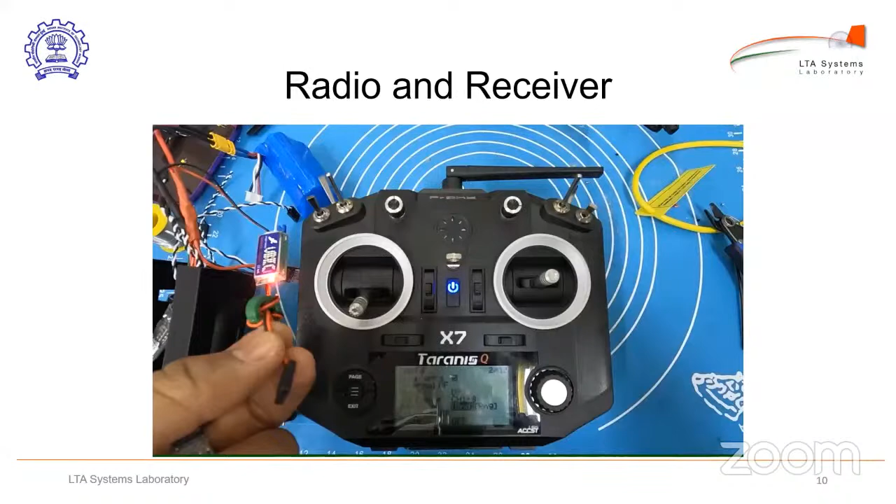So here I'm showing how I am binding the particular receiver to the radio. Different receivers and transmitters have a different method of binding, but it's more or less the same.

As you can see, the light is steady green. That means it has bound to the transmitter.

Because 3D printing gives us the exact drawing, the accuracy is higher in a 3D printed design rather than manual drilling of holes. You can even drill holes manually, but we would recommend a 3D printed gondola.

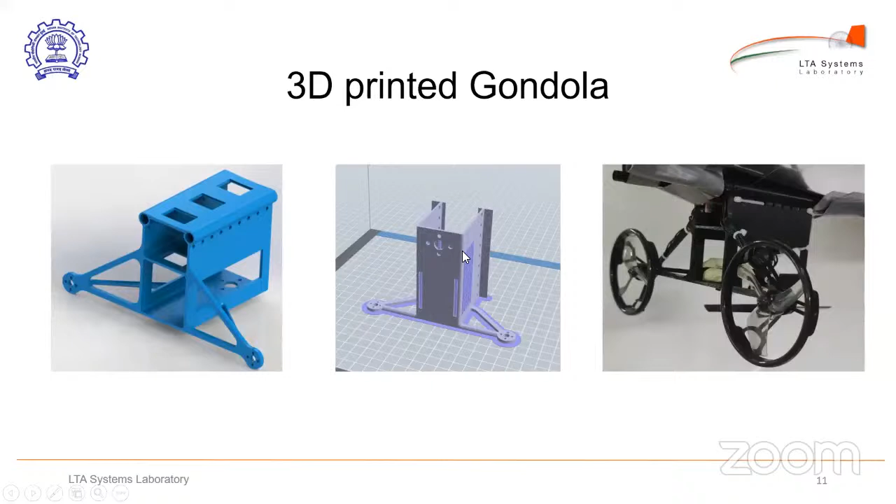So here we will show you the parts of the gondola, how the gondola looks like after 3D printing it.

So these are the protective coverings. These are generally used in small size multi-rotors, generally known as WHOOPs.

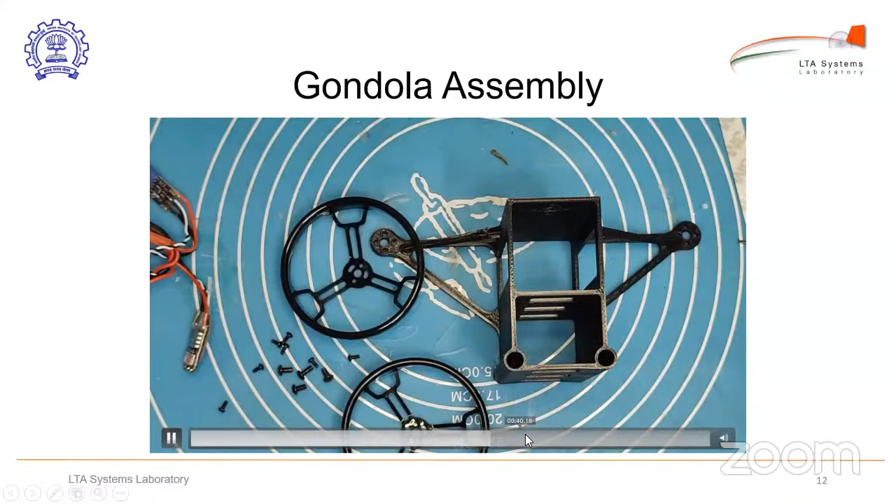Now we will come to the connection diagram. It's very basic. What you're going to do is connect all the positive wires of all the 4 ESCs together to the battery connection lead. Every battery has a different kind of connector, so you will have to get a particular kind of battery connector.

So this 650 mAh battery has an XT30 connector. You will have to get a male version of the battery connector, to which you will connect all the positive wires together, and also connect the positive of the UBEC, and then connect all the negative wires together of the ESC.

Now, because the forward thrust motors basically need the same signal - you want the motor to run at the same RPM when you give the throttle - there are two ways to do this.

Either you can connect both the signal PWM wires together and then feed it into channel number 3, or you can program channel number 4 or channel number 5 - that's programming in the radio. But for simplicity, you can join these two signal wires from the thrust motors and assign it channel number 3, which is your throttle.

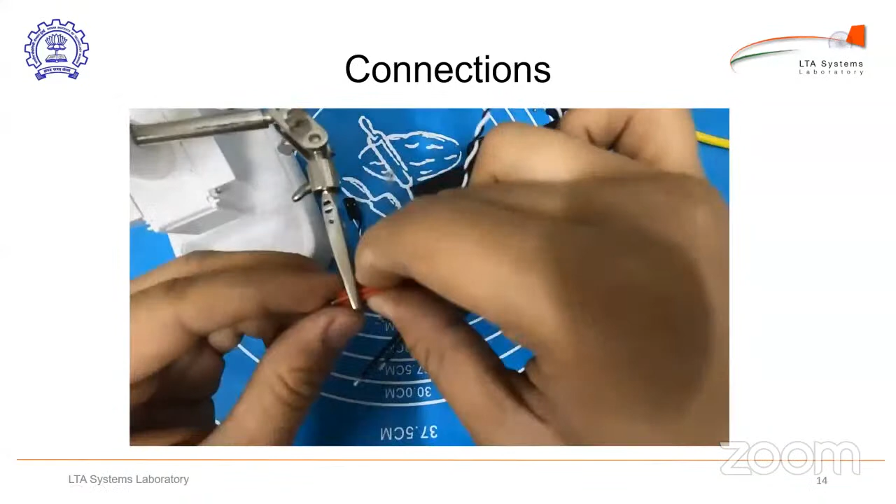So here you can see I'm trying to connect all the positives together. You can even use a power distribution board if you want to make things more precise, but it adds a little weight. So even this method works fine for a demonstration.

So this is the battery connecting lead, XT30.

So here I'm connecting, you can notice these two signal wires coming from the two motors, the forward thrust motors. I'm connecting them together, and then these will go...

Notice I've used heat shrink properly, everything, all the connections are covered. And this makes one connector, which will go into channel number 3.

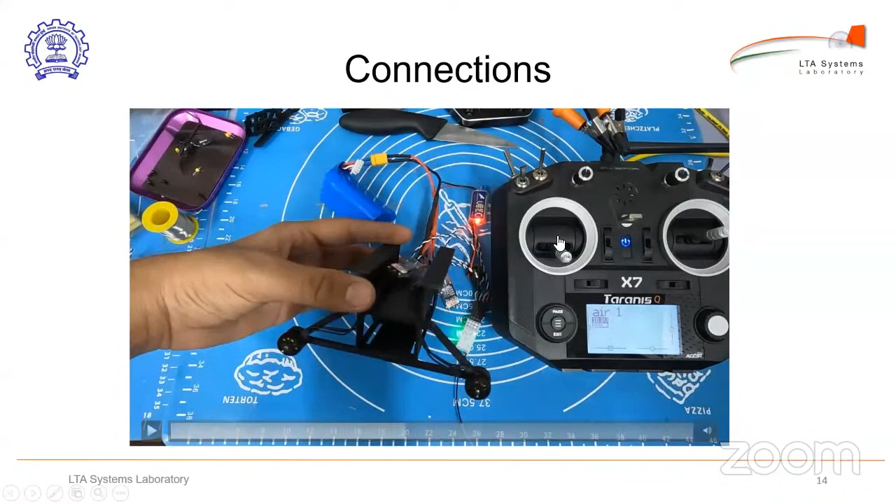The moment I bring it forward, the motor starts spinning. So this is how I'm checking the direction of the motor, because the motors are very small, very tiny.

And please note that these motors are very delicate. Please don't pull these wires, handle them with utmost care, because each motor is almost 6 grams in weight, which is very delicate.

So when the direction is not as per requirement - one direction should be clockwise, one direction should be counterclockwise - if it is not the way it is, you can swap any two wires. I would recommend swapping the two wires is the fastest way.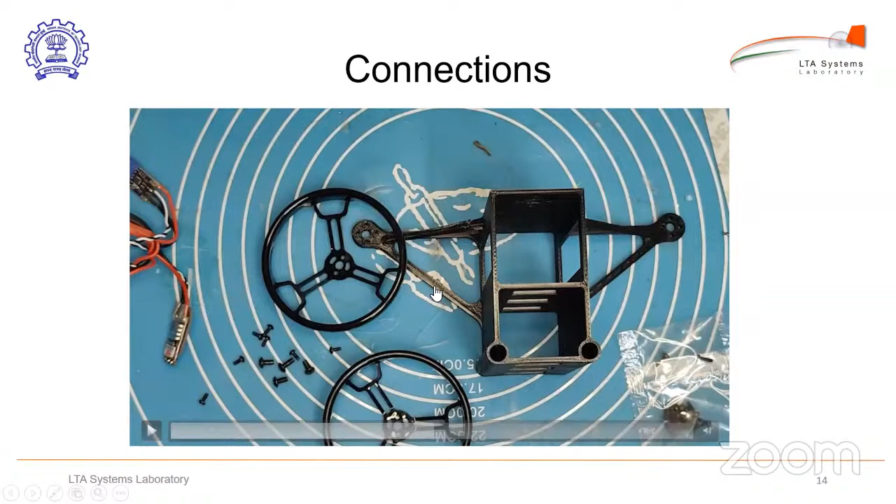So now I've added the ducts in this particular gondola, and then attaching all the electronics.

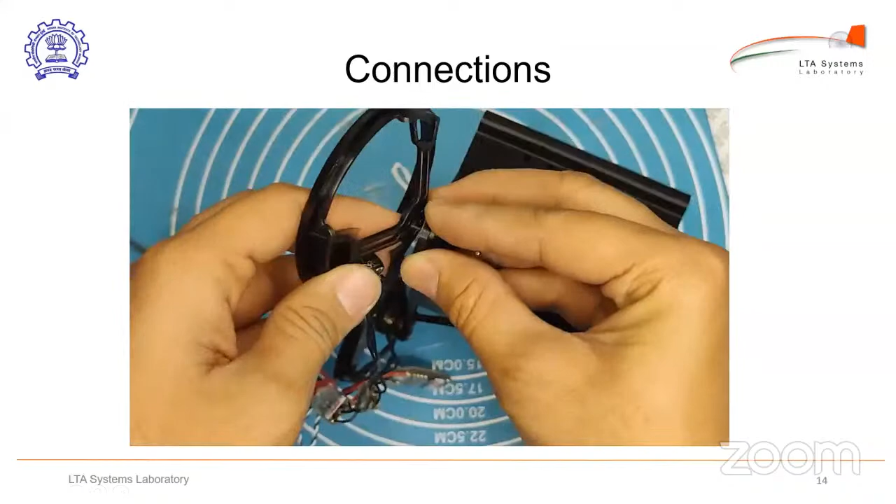Also make sure that all the wires are properly attached to the airframe. There's no loose wires, because the wires can come in contact with the spinning propellers. So you can use cable ties, as you will see, to hold the ESCs in place.

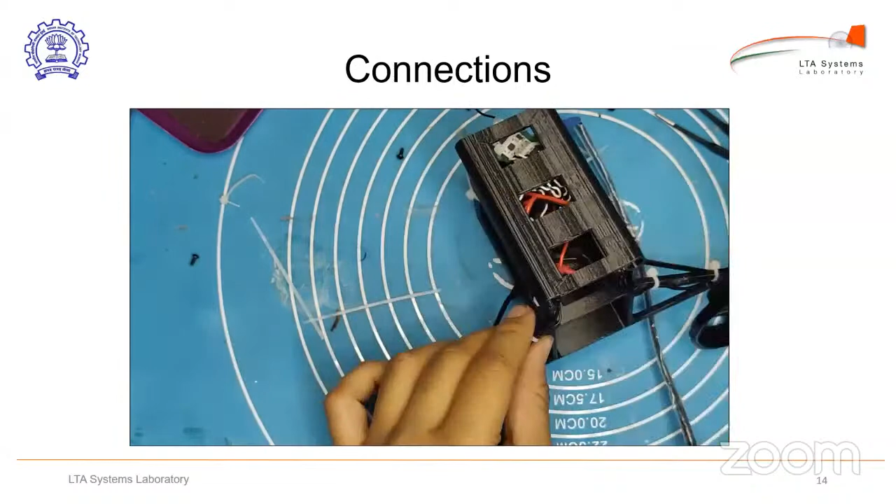As you can see, this region, this is the battery lead that is coming out. So over here we'll be mounting our battery, and this region is basically where you're mounting all your electronics, which is the ESC and the UBEC and your receiver.

This ESC basically is going to be connected to the rudder, which is already shown previously by Professor Dhanil, because the motor was already mounted onto the fin. So these three wires are going all the way till the tail.

So this is how complete connection is being done. We also need to do pre-flight testing to actually mount the system and do the right judgment for the direction, to make sure that the directions are correct and according to your own comfort.

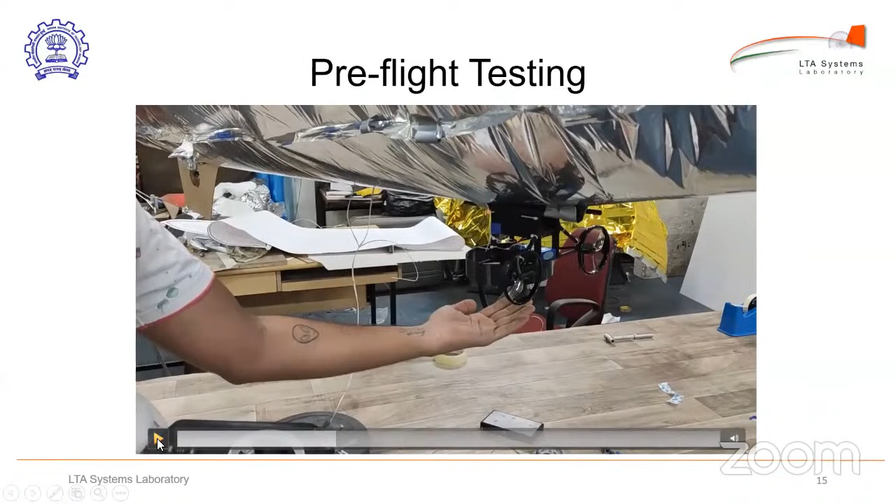And also note that I am giving very small inputs to the radio. So as you notice, the airship is going up when I'm wanting the airship to go up, and it's coming down the vice versa. You can notice my stick movement is very small.

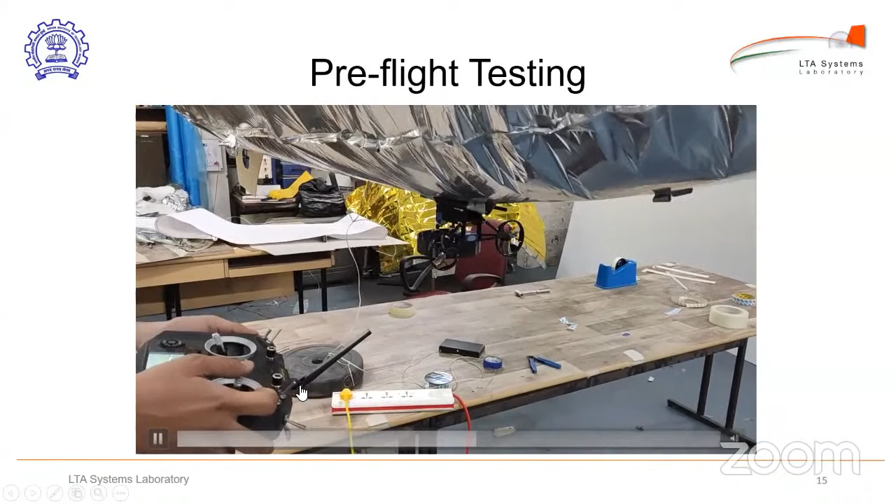Also note the meaning of a reversible ESC, that means bidirectional motor rotation. This stick, when it is in the center, the motor will be in the off state, but when it goes up, it will rotate in one direction. The moment you bring it below the center, it will immediately stop and it will immediately run in the opposite direction.

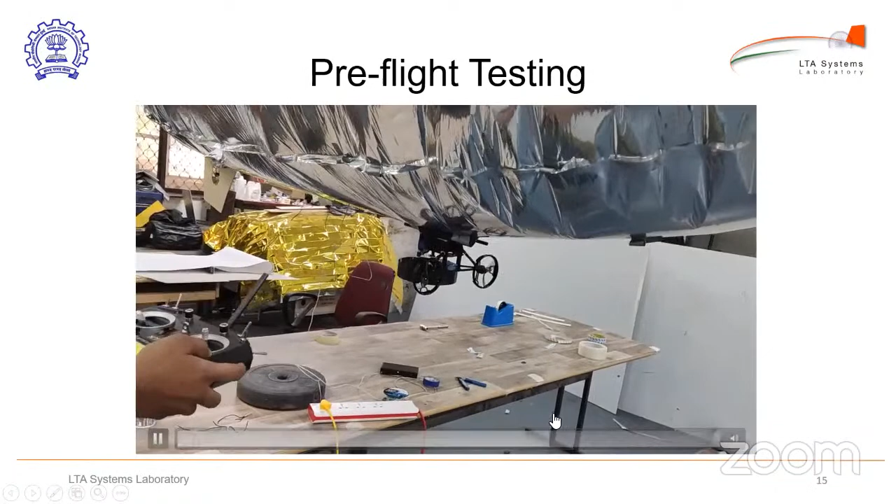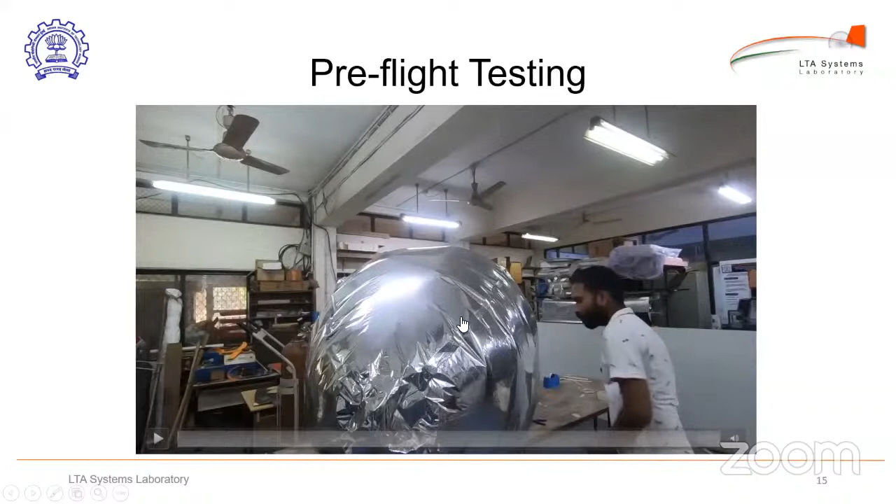So this is us testing the forward motor. So now this motion we're testing the rudder, and we have found out that all the connections are proper, all the directions are proper. We then head on to the flight testing.

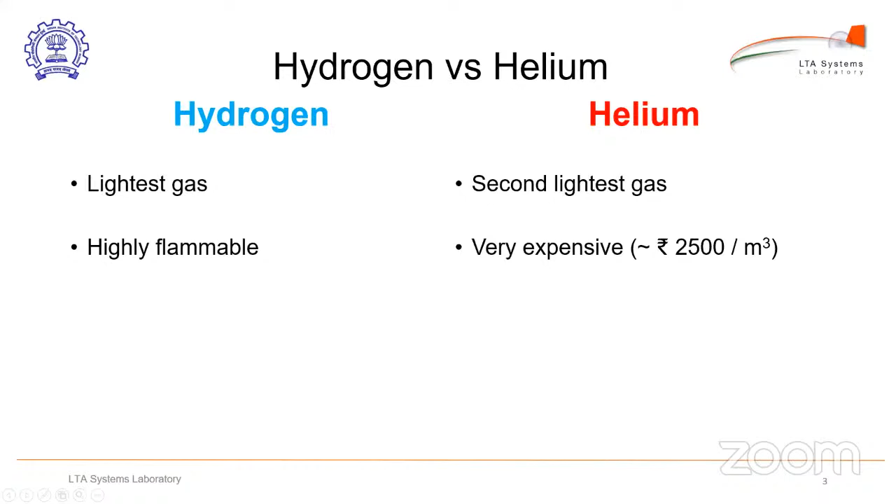Now, working with hydrogen is very scary for some people. Let us understand a little bit about the problem and what kind of issues are there. Many people say, 'I'll not work with hydrogen because it catches fire.' Let us look at what happens. How does it catch fire? What is required for ignition?

First of all, you need the gas, hydrogen. Then you need oxygen, because hydrogen itself will not ignite unless you take it to a very high temperature. There is something called the self-ignition temperature of hydrogen, but that is very high, and you are unlikely to reach it. So you do require oxygen along with hydrogen. But even if you mix hydrogen and oxygen, to ignite you need a third thing, and that is a spark.

Only when these three come together do you have an explosion. If you have only hydrogen, there is no danger of explosion. If you have hydrogen plus oxygen, there is no danger of explosion. Even if you introduce a spark in hydrogen in the absence of oxygen, there is no danger. But when you have a spark with hydrogen and oxygen available, then there is a problem.

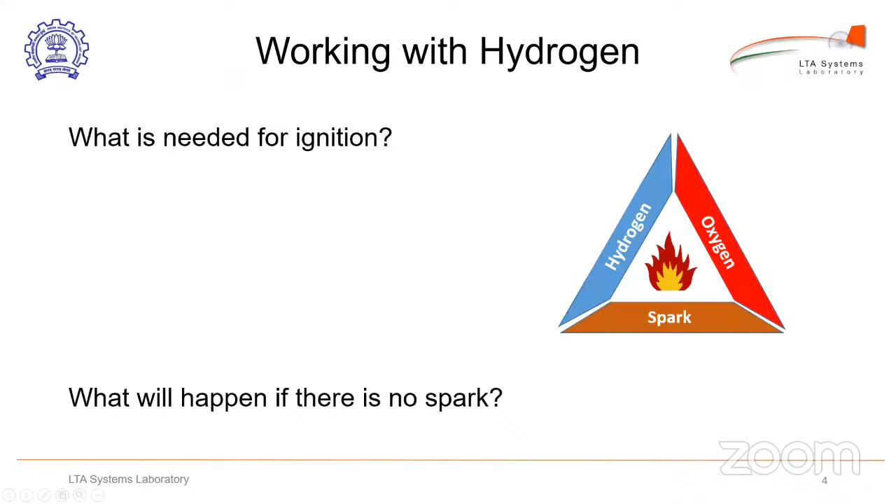We did a small experiment many years ago on what happens to a balloon filled with hydrogen. Is it safe to work on that with young students? So we did a small experiment. This experiment has been widely circulated in the LTA community all over the world, and we have received a lot of appreciation for doing it. So I'm going to show you a small video.

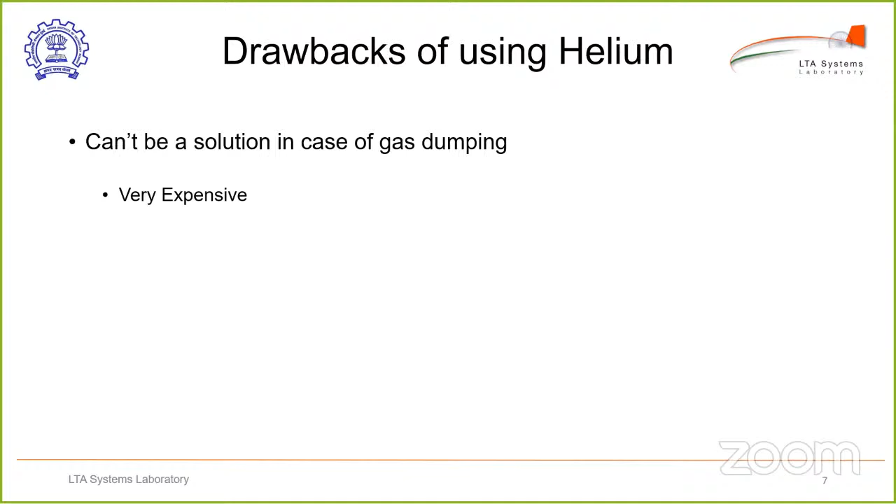So therefore, the drawbacks of using helium are that it can be very expensive and may become a non-starter. Plus, the gas weight is also high compared to hydrogen. We can work with hydrogen with proper care because it's easily available and highly affordable. As against 2,500 rupees per cubic meter for helium, the cost of commercially available hydrogen can be as low as 400 rupees per cubic meter, about 6.25 times cheaper. Actually, if you go to buy helium in the market, you'll find it's approximately 9 or 10 times costlier than hydrogen.

So it's your choice. When we conduct the regatta in IIT Bombay, we are going to supply you helium because we are trying to get sponsorship from some companies. If we don't get sponsorship, we will be forced to rethink and may have to supply hydrogen instead. But right now we are very positive and hopeful because there are still around 3 months remaining. We are trying to reach out to various sponsors to give us funds so we can give helium to all the student teams who come and visit us. We don't want to charge you for the helium because it would be highly unaffordable. But let's see how it goes.